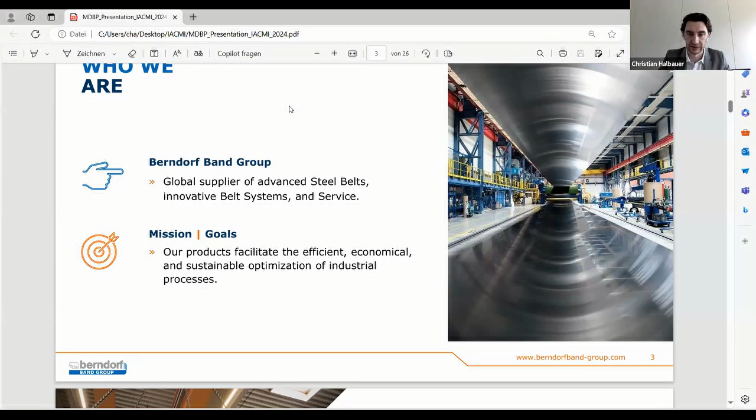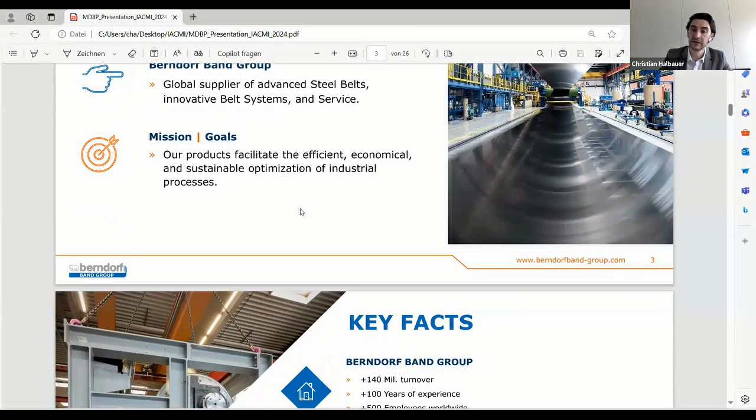Our mission and goal is actually very solution-based, meaning we try to find the most economical, sustainable, and process-optimized solution for our clients. We've been doing that for about 100 years already, with an annual turnover of 140 million.

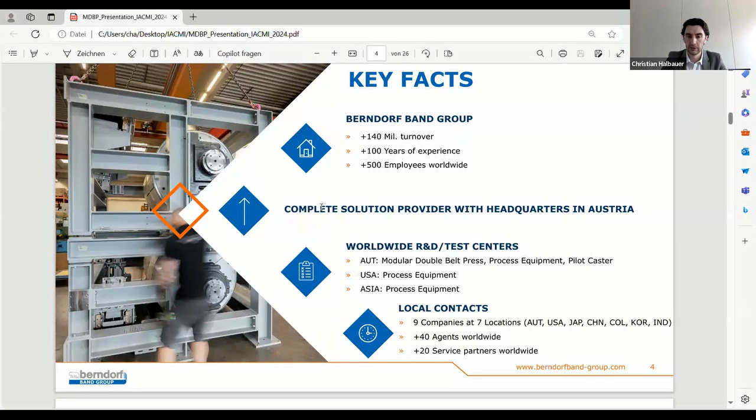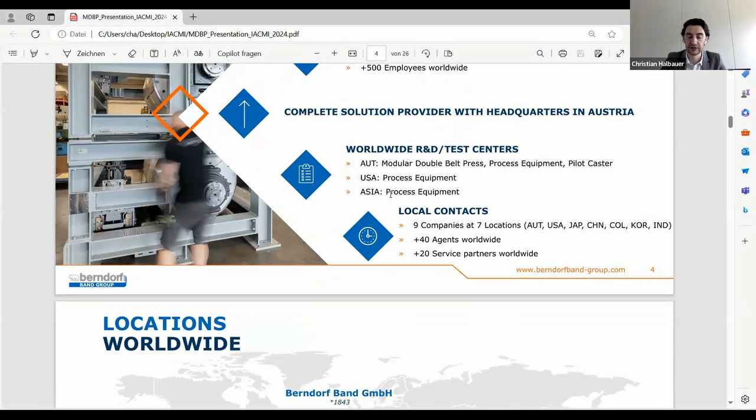All over the world we have 500 employees with us, across 7 locations worldwide that are our own subsidiaries, daughter companies. Plus we collaborate with 40 agents and 20 service partners to ensure we're always close to the customer. In terms of production equipment, our main production is located here in Austria, which applies to the steel belts and the machinery. Then there are different R&D centers in the US, close to Chicago, and in Asia, Japan.

So that's just an overview again of our locations worldwide. Wherever you might be, you're probably pretty close to us.

Now talking about our modular double belt press, I would like to start by going through a rough scheme indicating specific parts of the machine and the surroundings. When we are referring to the continuous pressing process, we divide this into 3 different parts.

Part number 1 is the upstream equipment. This applies to the feeding of the material. Here we can use various kinds of feeding devices, such as scattering units, if your product comes in the shape of powder.

We could use unwinding units or even an extrusion die, if that's what you need for your product. Once we enter the press, we start at the drums on the bottom and on the top. Usually those are preheated at a temperature of around 120 degrees, with thermo oil. Within the press, I'm going to go into more detail a little later on. Just a rough indication, we divide into a heating and a cooling section.

And at the end, we usually apply a release agent so as to make sure that the product is not sticking to the belt. All of our release agents are PTFE and silicone free. So if you're engaging in any kind of automotive or aerospace industry, you'll probably be pretty happy about that, since this, at least as we know, is a very strong requirement there.

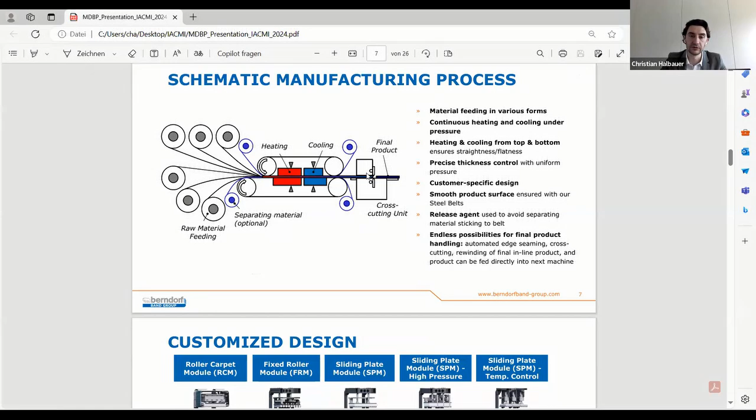At the end, this is what we call the downstream equipment, the counterpart of the upstream equipment, which could be like edge seaming devices, cross-cutting units. You can take your product off the belt, or even if you have a fully automatic process, transfer it to the next machine.

Now talking about our customized design. The reason why we call our modular double belt press this way is that we do have interchangeable modules. So there's a certain set of standards already in place, but those standards are arranged according to customers' needs. Means we do not have one fixed configuration. Every module is interchangeable with the other.

Talking about composites specifically, for the thermoset-based composites, we would use the roller carpet module, which goes up to a pressure of 290 psi and 482 degrees Fahrenheit. Since usually thermoset-based composites require a constant pressure and temperature level, this is the module we would go for.

For other industries, not so applicable today, but just to let you know, like for example for synthetic flooring, synthetic flatware, we can produce polymer sheets on a fixed roller module where you have a punctual force instead of a continuous carpet.

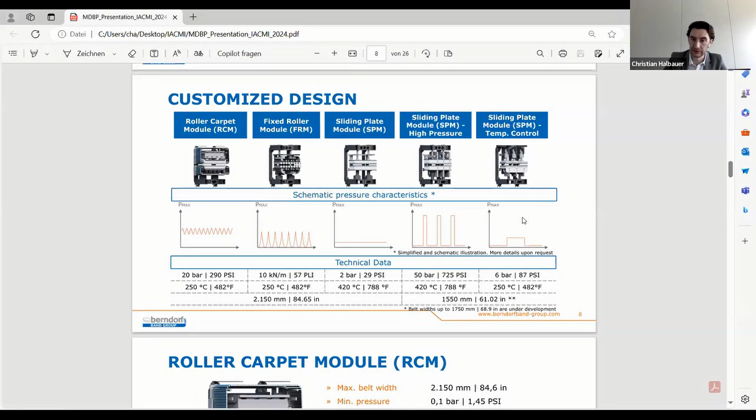A strong tendency we've seen in Europe and especially in Asia, the trend is going to thermoplast composites. And for this kind of field, we have developed a special set of modules, which are unique. They are protected by a patent and do have some special features which I would like to discuss with you today in some greater detail.

I'm going to zoom in a little, since you can see here, as opposed to the roller modules, we do have over here sliding plates. Those are made out of graphite, which gives them very good thermal conductivity. For each part of the process, we have a different set of sliding modules. This one, for example, with the continuous plate, would be used for preheating.

The high pressure module, again, I'm going to introduce it in greater detail a little bit later on, has high pressure beams where we can apply pressure levels of up to 50 bar. And then we also have one for temperature controlled cooling, so as to make sure, especially for the thermoplast composites, we can adapt to the polymer specific cooling curve. So instead of going with a very high temperature and then immediately decreasing it to a lower one, we can do it step by step gradually.

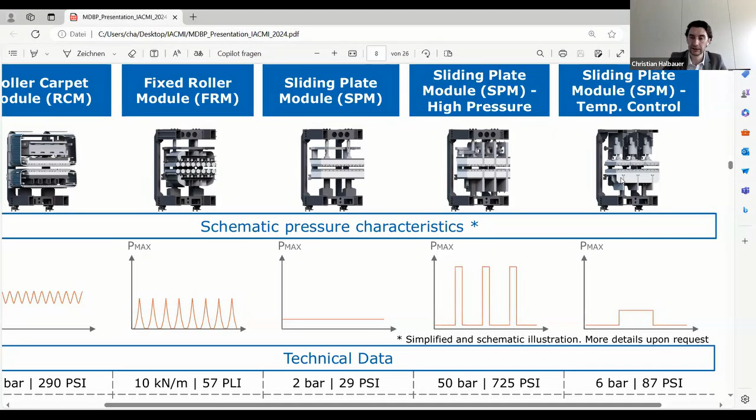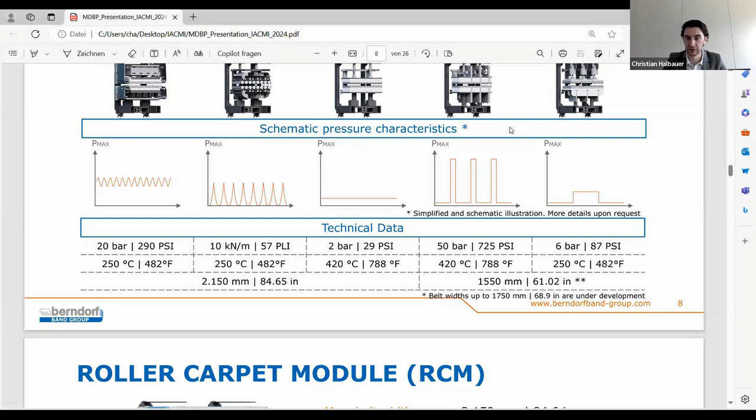In general, we have different options for heating and cooling our modules. Our modules can be either heated by thermo oil, in which case they can go up to 250 degrees temperature, which is 482 in Fahrenheit. Or we can also use electric heating rods, and then we can achieve higher temperatures of up to 420 degrees with a pressure level of up to 50 bar in case of the high pressure module, which gives you like 725 psi in pressure.

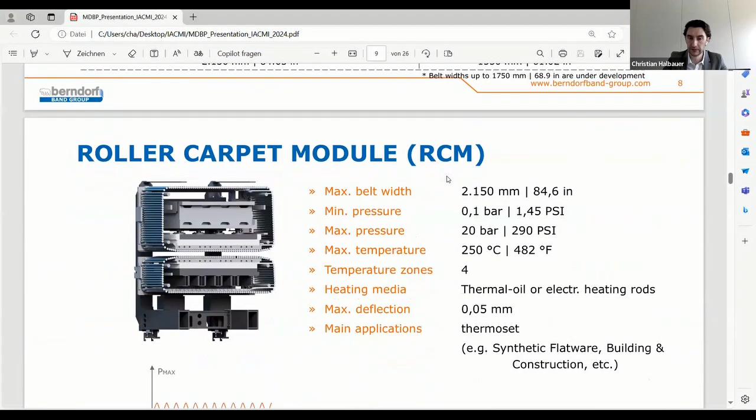So this is our module for the composites based on a thermoset production procedure. This is the one we would use. We can go up to a width of 2.15 meters, which is around 85 inches.

We also have the possibility to integrate different temperature zones within the roller carpet module. So if the overall length is 8 meters, we can divide this into 4 sections, each around 2 meters, for achieving a consistent or increasing temperature curve, whatever you need for your product.

Other industries using this kind of procedure are synthetic flatware, as said before, and it's also popular with building and construction materials.

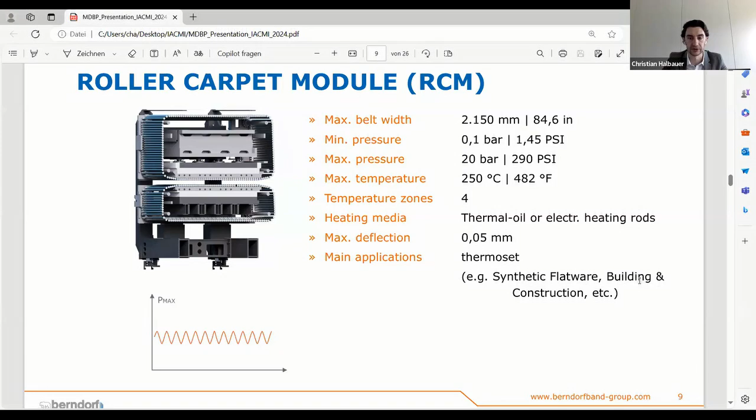Just teased a little bit earlier, this is the application we have in mind, especially when it comes to thermoplastic composites for the automotive and aerospace industry. We've made good progress, actually just achieved a major success with a huge supplier from Germany, providing this type of setting to them.

It goes like this: at the entrance, once we reach the first module, it's called the sliding plate module for heating. It's like preheating at a very low temperature level. As you can see here, we go with up to 0.2 to 0.5 bar and increase the temperature up to 420 degrees, depending on the type of polymer you're using—could be PA6, PA12, PEEK, PPS, PPA.

We're used to working with various kinds of polymers. We also have the possibility to divide the plates into 2 sections, again to make the preheating a gradual process.

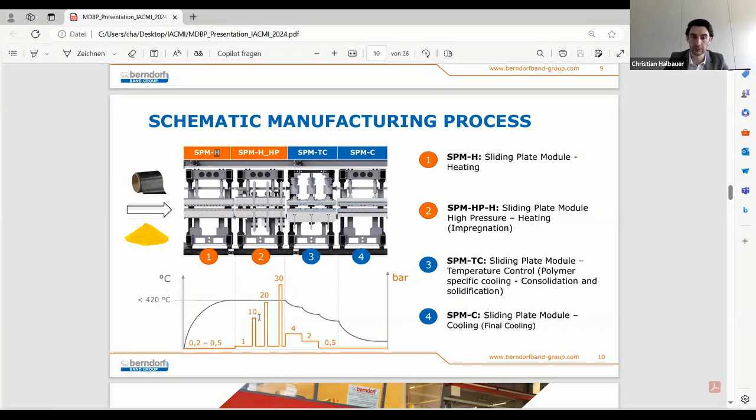Within our second module, you can see we have different options to adjust either temperature or pressure, or in that case both, because here you have the high pressure beams. At the surface of those beams, we can apply pressures of up to 50 bar.

Next to them, you have different heating and pressure sections. They are independent from one another, which means you can set one temperature here, like 400 degrees, and 420 here, with different pressure levels. So it's fully adjustable, due to independently working cylinder equipment.

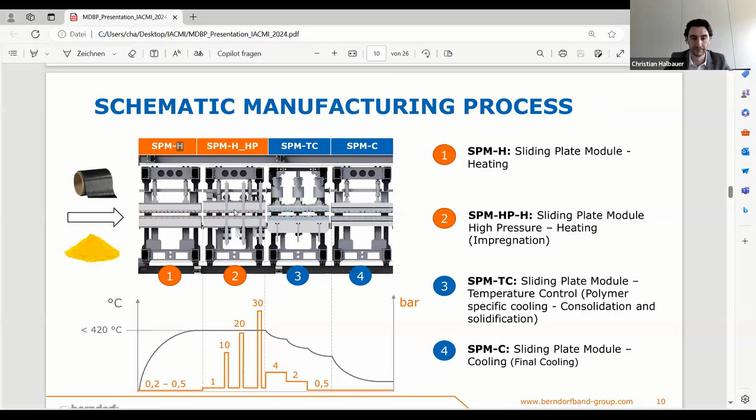So the second module, the high pressure module, is where the impregnation takes place, which means where we get the fibers together with the polymer.

In the third section, we start cooling down. Similar to the second module, the third module also provides you with the opportunity to adjust your process to the needs of your product, which means for all 3 sections, as shown by the cooling curve and the pressure line, you can independently select different settings for pressure and heating or cooling for each section.

The final cooling for achieving proper surface quality takes place in the last module, the sliding plate module for cooling.

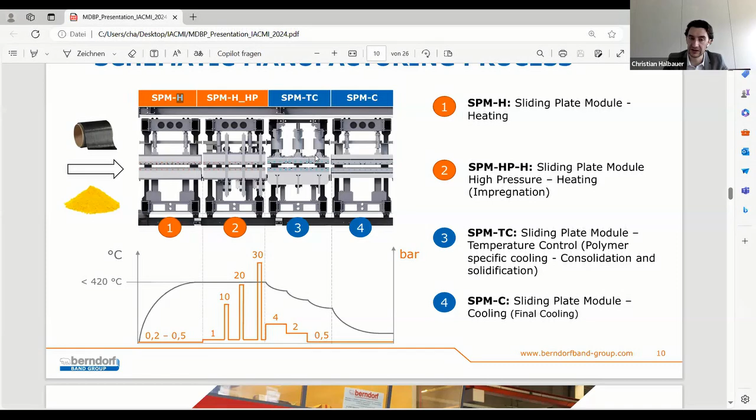By our sliding plate module, we can achieve a continuous heat transfer as well as a homogeneous and product-suitable pressure application. This provides you with achieving the right density level, but also optimizing surface quality, since we do not have those patterns that can evolve from using a roller carpet.

In reference to the applications, just want to give you a rough overview. As of today, we are mainly focusing on the composite section. You can see different kinds of products here.

We are talking about UD tapes with thicknesses of 0.1 to 0.2 millimeters. We can produce organo sheets, prepregs, semi-prepregs, honeycombs, as you can see here, or standard sandwich panels. Basically anything can be produced.

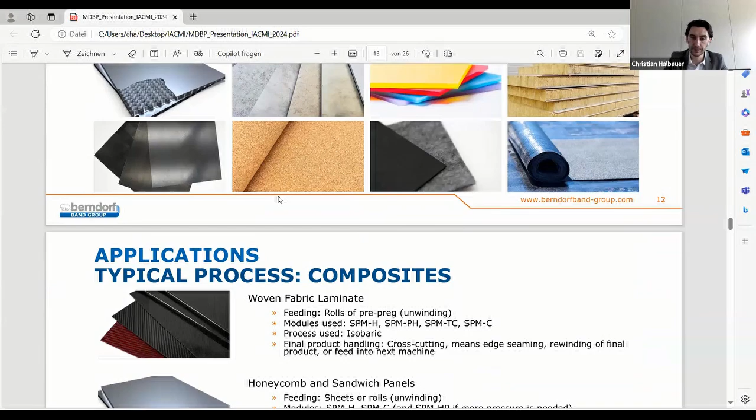This is due to the fact that our machine can run in 2 modes, which I can indicate here. For example, for honeycomb products or sandwich panels, some of those might require a very low kind of pressure so as to not damage the product.

In that case, our machine is capable of running in isochoric mode, which means we drive with a consistent gap.

For other products, such as woven fabric laminates or UD tapes, it's all about the pressure we apply to the product, and in that case we drive with a consistent pressure. So you can either choose, when going with our machine, between driving with a consistent gap—isochoric mode—or going fully isobaric by driving with a consistent pressure.

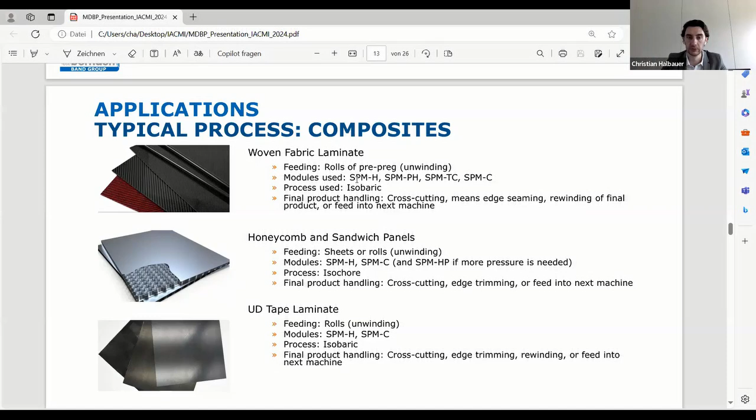Just closing the loop here, as you can see, there is no standardized configuration. So we give recommendations to our clients based on our experience, and based on this recommendation, we usually would, together with you, select the type of modules that are most suitable. The modules are always the same, just in a different kind of configuration.

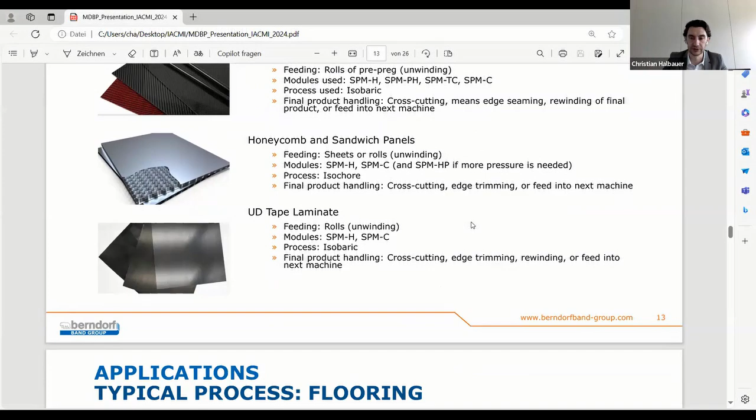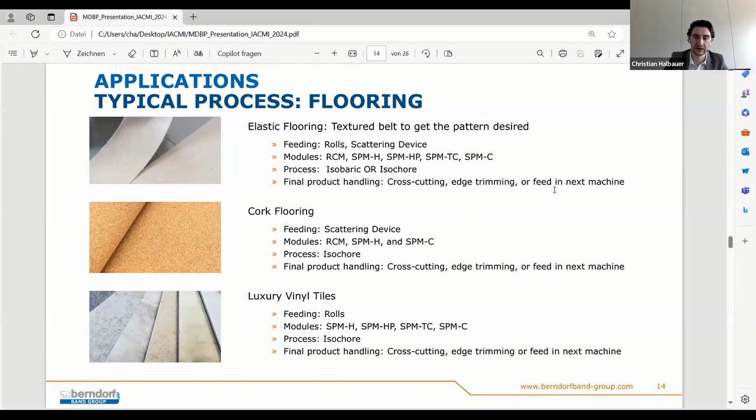These are some other case studies from the flooring industry. Also here, maybe just to point it out, we can provide you with the required downstream equipment, which is cross-cutting, edge trimming, feeding it to the next machine, going fully automatic. All of this is possible.

Maybe one more remark to the feeding devices. We do have our own feeding devices, or at least some special kind of application for getting the product in the right shape on the belt. Since some of you might know, when applying a product, especially once it's scattered, and we are talking about a powder, it's a sensitive issue. So as to make sure it's distributed very evenly on the belt, so that we have a nice result after pressing, as otherwise you might get a problem on the edges.

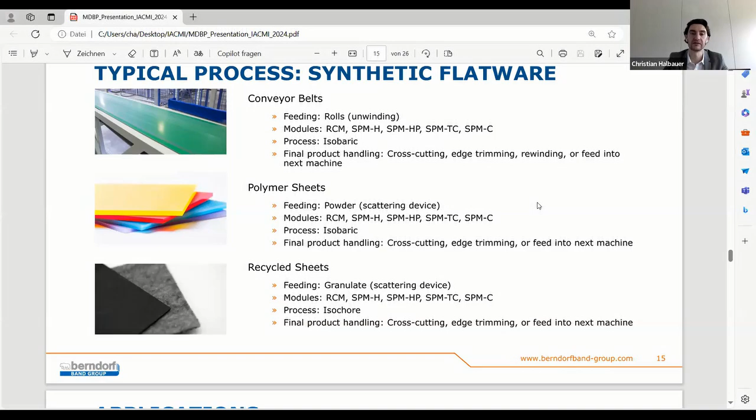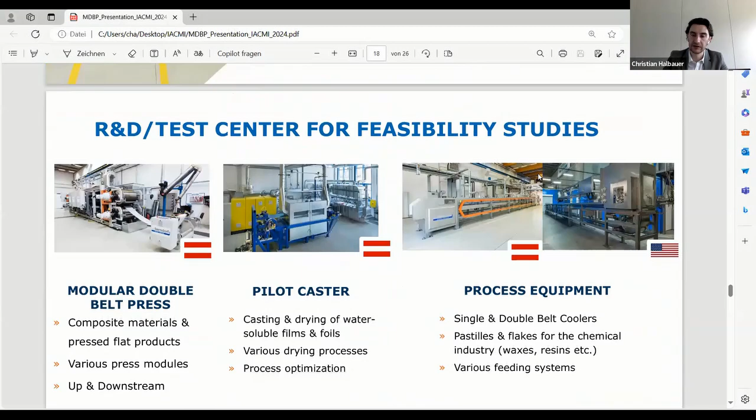Now a few words in regards to our headquarters in Austria. We do have an R&D center here, as well as in the US and in Asia. In Austria, this is basically where all three main product groups are located, which is our double belt press system, the casting machine, and the process equipment for the chemical industry, for refineries, for example. This process equipment R&D center we also have in the US.

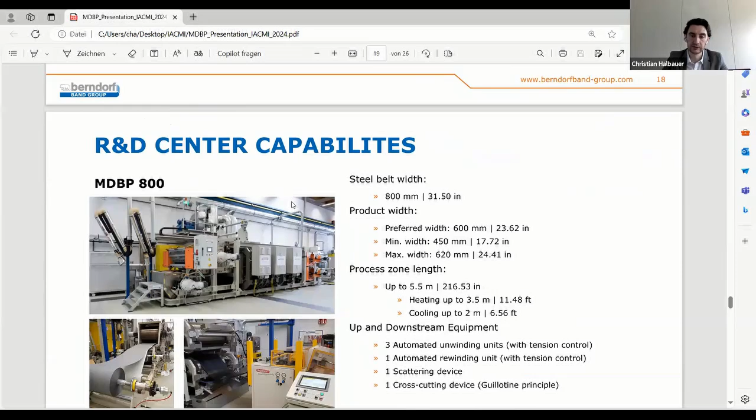For our presentation today, I'm going to introduce to you our R&D center capabilities. What we do have here is what we call the MDBP 800, which stands for Modular Double Belt Press in the width of 800 millimeters, or 31.5 inch.

The machine comes with an overall width of 800 millimeters on the belt and gives you a final product width between 450 to 620 millimeters in a total length of around 5.5 meters, or around 220 inch. We can equip the machine based on your needs with different kinds of modules, since the frame has the right length to adjust to your needs and put one module in while putting the others out.

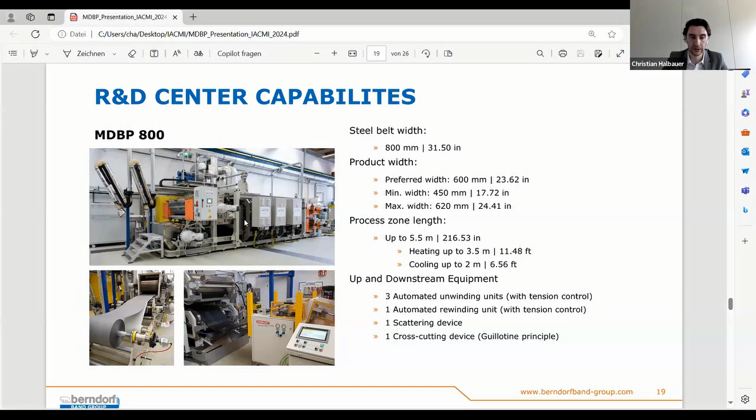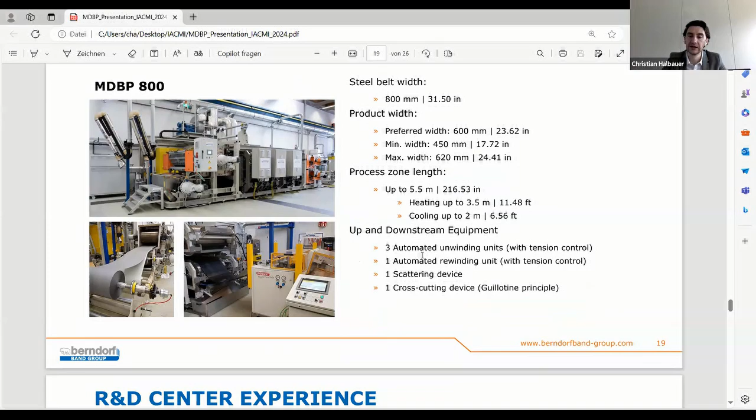In regards to the downstream equipment, if you would like to come visit us and test with us, we can provide you with unwinding units, rewinding units, a scattering device for the powder, and a guillotine at the end of the line.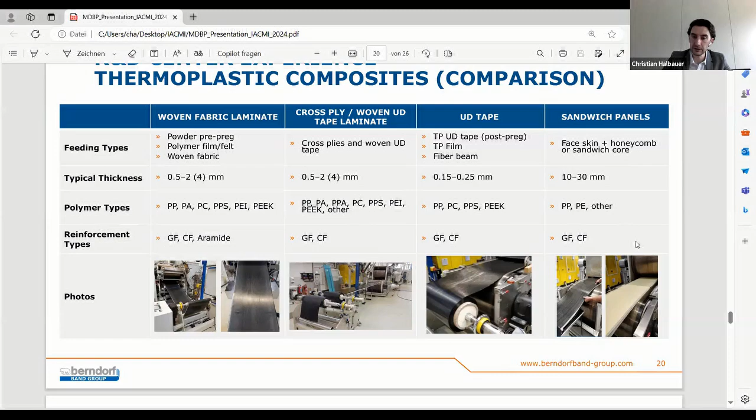Regarding the reinforcements, the fibers, we can use glass fibers, carbon fibers, aramid. All of this is possible.

Once you decide to come to Berndorf and test with us, or develop your product together with us, the procedure would be like this: We visit our R&D center, run the trials on the machine, try to set the parameters for temperature, pressure levels, as well as the right kind of module selection together.

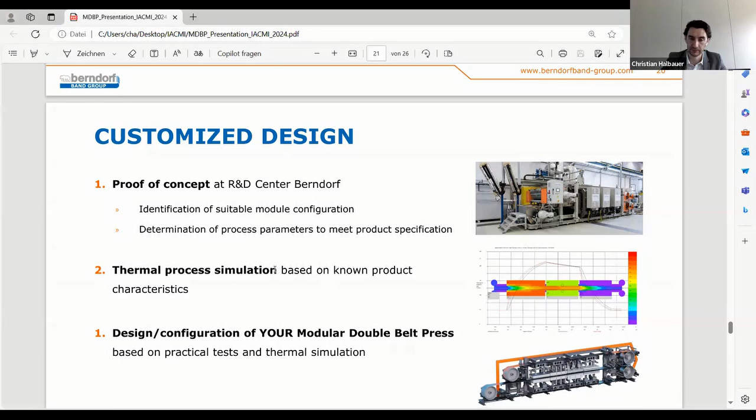And based on that procedure, and according to the final width you need, since our machine can only give you product widths of 450 to 600 millimeters here in Berndorf, we would upscale your machine, for example, up to a width of 2.15 meters within a thermal process simulation. And then we can provide you with a 3D drawing, including a thermal simulation and a quotation for your product being produced on our machine.

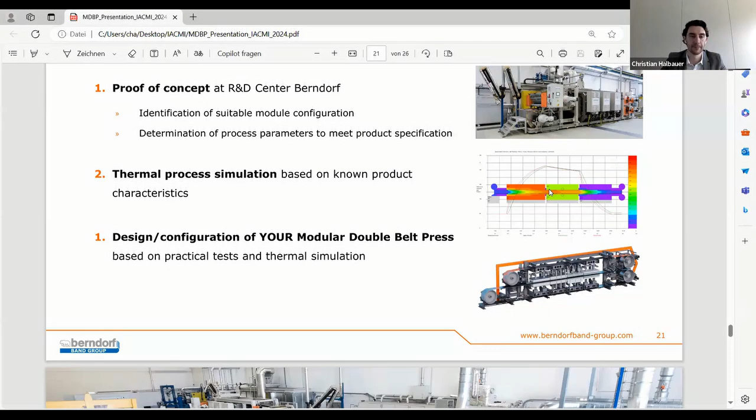As said before, we kindly welcome you to come to Berndorf, visit our factory for the steel belts and the machinery. If you do have some R&D projects currently going on, please feel free to contact us. We are used to that kind of early stage in the process. You even have the possibility to do small batch productions with us that you can sell to your customers.

These days, we are pretty well booked until December this year, since we see a strong and increasing demand, especially from the automotive industries when it comes to battery applications like battery housing, pouches for the battery. Those are things that we are currently strongly investigating and seeing a strong demand in.

In closing, a few words in regards to our service setup. In the beginning, I told you about our different subsidiaries all over the world. The same applies to our service organization. We have 11 service hubs that are run by our partners, and 10 service organizations that belong to our group, located worldwide, as you can see here in Europe, represented also in the US and South America, as well as in Asia, plus 5 tool bases for more secluded areas such as Saudi Arabia.

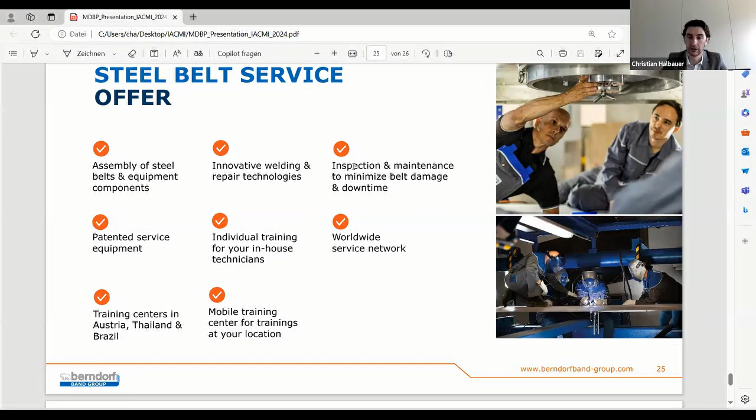Whether you have a double belt press in use these days or not, we're also happy to help you if you have any issues or requirements in regards to your steel belt. We can do repairments for you. We have developed special tools, such as shot peening tools, to repair cracks and dents on your belt. This can be done by our service guys, who are trained technicians, and we can also teach your staff. If you ever want to get to know how to repair a steel belt, your people are welcome to visit Berndorf and undergo a training, which takes 2 weeks, and then they should be capable of doing those small kinds of repairments themselves.

At the very end, I'd just like to finish this presentation with our most recent reference, a German company who decided to go with our machine for thermoplastic based composites, mainly producing organo sheets. The company is called Ensinger. This article was just recently published in Europe in the magazine called K, and worldwide within the compositesworld.com organization.

Thank you very much. I'm happy to answer your questions if there are any.

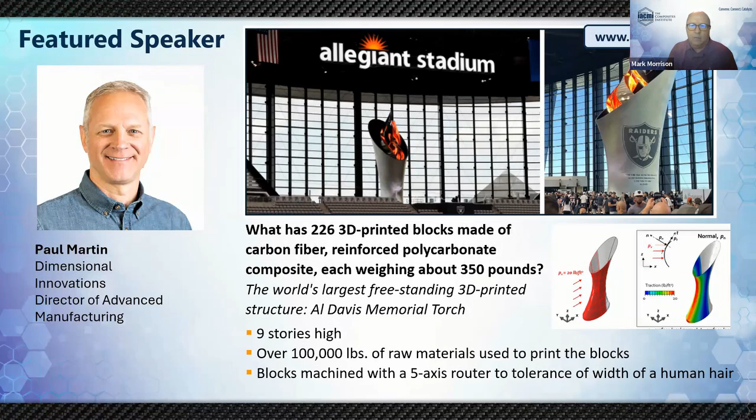I also wanted to point out, if you're familiar with Paul Martin, you may have seen some stories we've promoted. Paul is the Director of Advanced Manufacturing at DI, Dimensional Innovations. It's a really neat story that DI has, working with Purdue, working with other IACMI members including Thermwood. When you look at it, what does the Al Davis torch have to do with composites, IACMI, and Indiana? I won't read the details, but it's a pretty neat story Paul tells — a story of partnership, a story of innovation, and the challenges they had to build what's known as the world's largest freestanding 3D printed structure, the Al Davis Memorial Torch, which is in Las Vegas. If you're an NFL fan, you're certainly familiar with that stadium, which has come online in the last two years.

Another featured speaker is a gentleman named Jim Vinoski. Jim is a Forbes magazine contributor, but he's someone who spent a lot of time in manufacturing. He's a manufacturing executive, still active on the shop floor. He's worked with companies like General Mills, making products from food to plastics. Jim's stories contribute to Forbes magazine focusing on manufacturing, and he also has a podcast and website, Manufacturing Talks, where he keeps updates on trends. Jim's going to talk to us on Thursday, the second day of our main session, and I think you'll look forward to what he has to say. He'll arrive and be at the tour at Purdue, so he'll be with us for a while and you'll be able to network with him too.

We're pleased to have a sustainability panel. Hannah Mason — many of you know Hannah.

She's the technical editor and really the sustainability lead when it comes to Gardner Media, so we're pleased that Hannah's going to be able to moderate this. And then you see the distinguished panelists that we have. In fact, if you haven't seen, you can Google a story that Hannah did featured with Eric Heiss from IDI Composites International. I think that story ran a month or two ago. It's pretty neat about how they're looking at new ways to incorporate sustainability on the front end of what they do. So you see the rest of the speakers, were very pleased. Each one in their own right has a unique perspective they're going to bring to the panel. Workforce panel, obviously the key right now is, are we

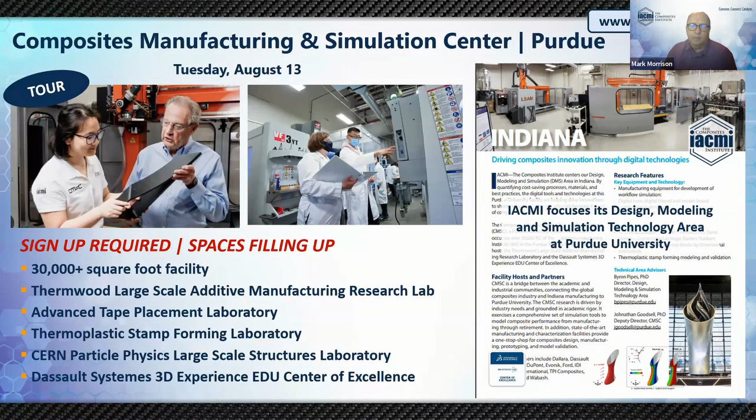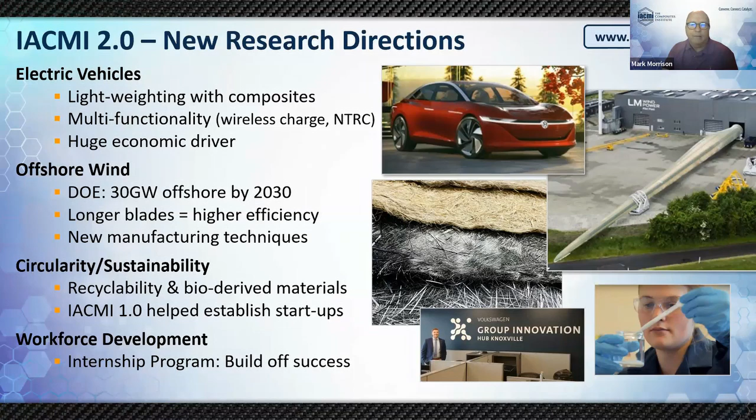As I mentioned, we're going to do a welcome mixer at Victory Field, the minor league ballpark for the Indianapolis Indians. They actually play St. Paul, a team from the Minnesota Twins Farm League. But we're really looking forward to getting together and networking in what we're calling a mixer. We reserved the outdoor patio, and it'll be a great opportunity to interact. If you're folks like Kevin Lyon, Joe Fox, Chris Vickery, Tom Dry, and some of our core members from the composite side, you may not know much about our workforce programs like America's Cutting Edge and Metal. So we want to foster interaction during this mixer, which will happen throughout the entire IACMI event, as people exchange in a networking environment and get to know each other. We're looking forward to this venue, just 0.3 miles from the hotel.

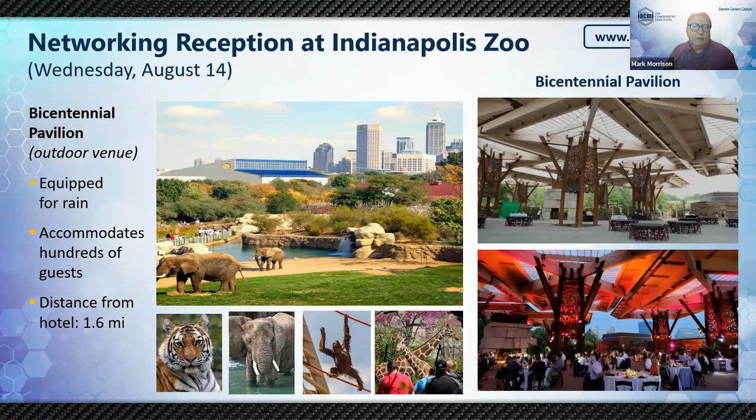Again, one of the hallmarks of our activity is the networking reception. On Wednesday night, we're looking at having a reception at the Indianapolis Zoo, with bus service to and from the zoo running a continuous loop. It's a real neat venue with a bicentennial pavilion. I think this will offer a unique perspective—not only the animals, but there's an indoor oceans pavilion, and a beautiful view of the Indianapolis skyline too.

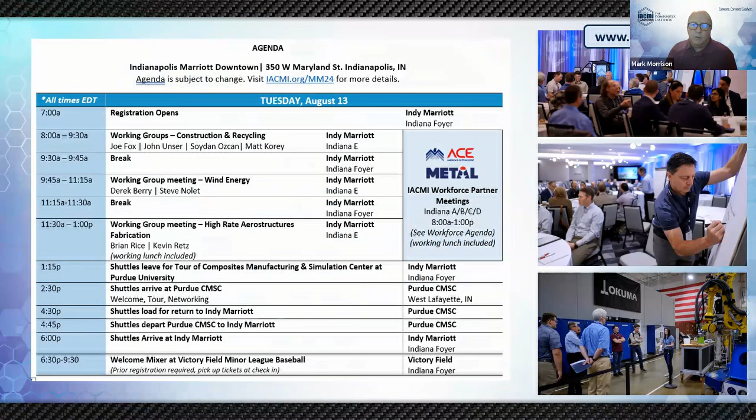I'm not going to go through the details, but I want everyone to know that we do have a near final agenda. It's on IACMI.org/MM24—you can click on agenda and get a look at this. It's also available on our website: go to IACMI.org, then members meetings, and you'll see the near final agenda. The point is, we're pleased with what we've got lined up—it's very robust, with engaging speakers, engaging topics, and plenty of networking opportunities.